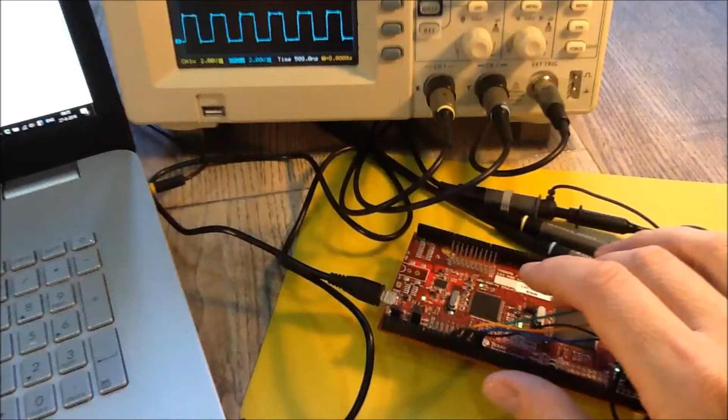I'm trying to make a smart instrument from my Hercules launchpad, an instrument that can be controlled from LabVIEW, and I have made some progress. So what I have done is I've made firmware that listens to LabVIEW commands and then can switch on or off PWM signals. I'll show you here how it works.

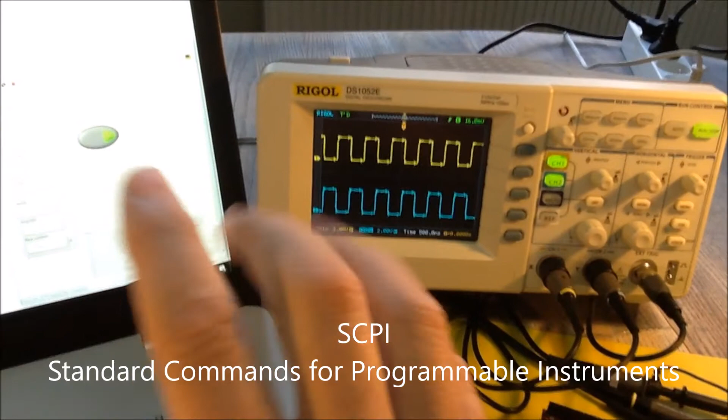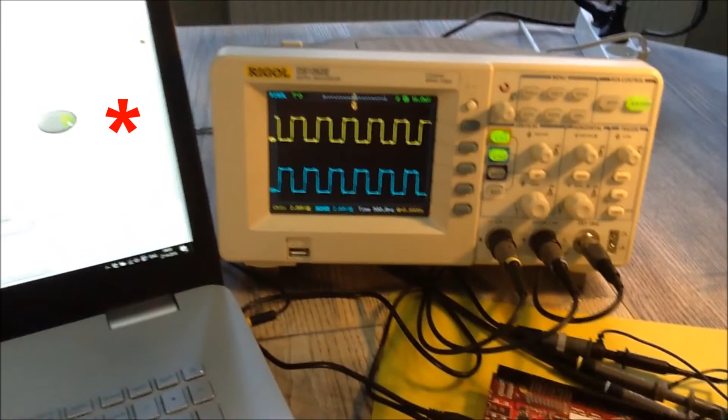This is the LabVIEW project I made. It talks over USB to my Hercules launchpad. The language that it talks is SCPI, the standard instrument automation language, and I'm measuring the PWM signal on my oscilloscope. When I click the button here to off, there is a command sent to the launchpad that switches off the PWM, and when I click it on again, the PWM switches on.

In today's video we will have a look at the LabVIEW project. It's still a simple and straightforward example, but that doesn't matter. It shows that I can talk to the hardware and that I can control the launchpad. From now on, all options are open.

You can see my LabVIEW project here and the corresponding block diagram. The design is based on one of the standard examples of LabVIEW called Simple Serial. The Simple Serial example just shoots a command to a COM port that asks for a device ID, and then when a device answers, the response is shown in these two fields. What I have changed is that instead of asking the ID, I'm giving a command to start or stop PWM.

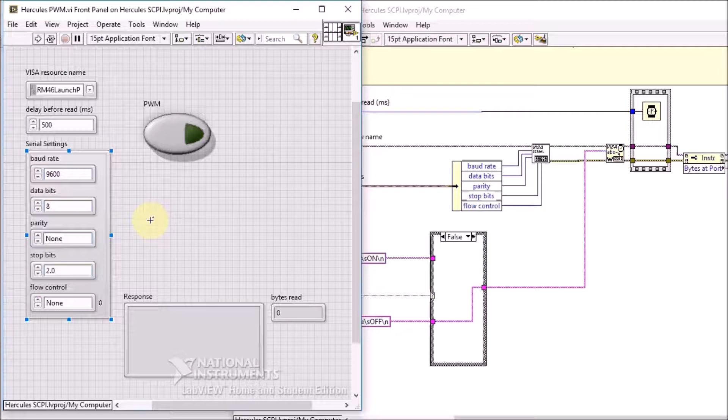On the left side we have the connection settings. This is an alias for your COM port. We have a baud rate of 9600, 8 data bits, no parity, and 2 stop bits. That is identical to how I configured my launchpad. And then I've put a boolean control here that says whether I want to have PWM output or not.

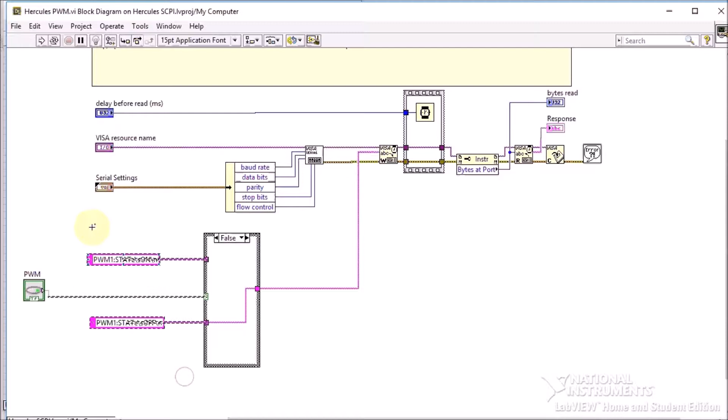If we switch to the block diagram, you can find the same controls back. What you see here are the configuration settings for the serial port. And this is the part that I made to control the PWM. I have two string constants that represent the commands that I'm sending to the launchpad. One is to turn the PWM on and one is to turn the PWM off. And let's have a look at the firmware to see how this works.

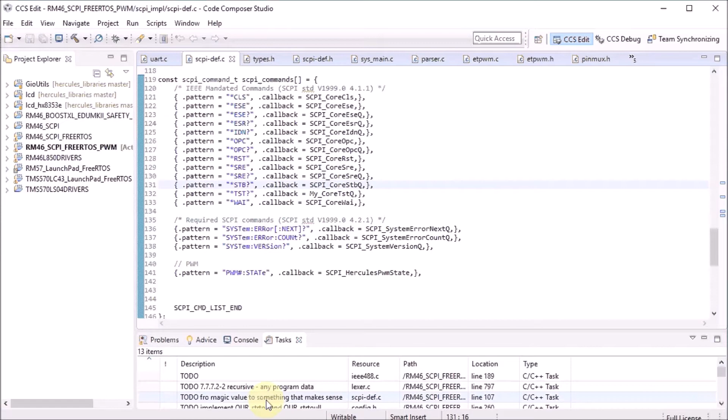I have added a pattern for PWM state commands. So when I shoot a PWM state command from LabVIEW, it will be captured by a function that I provided called SCPI Hercules PWM state, and that one will either turn on or turn off the PWM. And that's what these two string literals do.

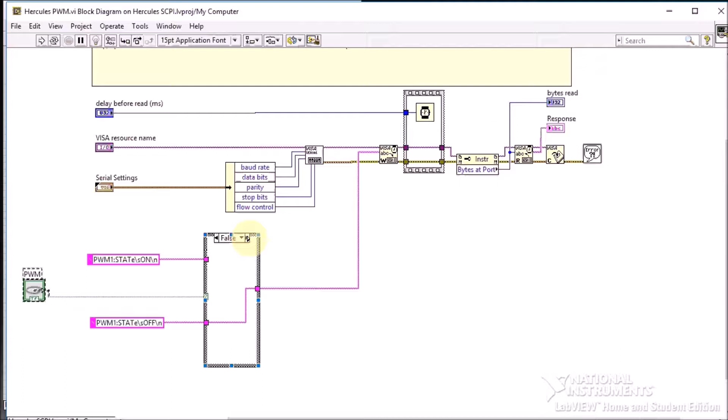The second thing that I've done is added a boolean control, a toggle switch, and that one will determine which of the two commands is sent to the USB port. If I toggle the switch to false, you can see that the lower string literal is passed through, and if I toggle the button true, you'll see that the upper command is sent to the USB bus.

Let's bring in the oscilloscope and see what happens if we run this project with the button toggled high or low. We'll start with low, so we switch off the button. I'll enable the step-by-step option of LabVIEW and start the project, and let's see what's happening. The button is low, so it goes the lower trace. And once the command is submitted, we should see here that our PWM signal stops, and that works perfectly.

Let's now switch our button high and do the same. I'm starting the command and let's have a look at the scope while it's running. Once we reach this point, we should see that the PWM signal switches high. Voila.

And I'll run the two scenarios again so that you can have a look at what's happening while it's running. You'll see that if I put the button low, that this line here switches to the bottom line, and this static control activates when I put the button to high. This line is active and the data flows like this.

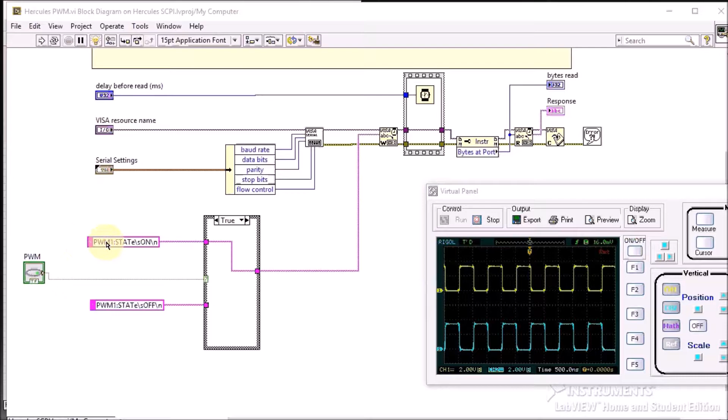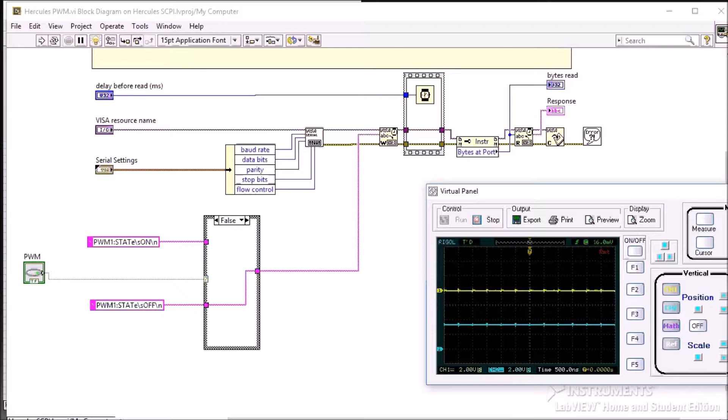So I'm going to rerun it again with the boolean control off. There we go. It switches. The data goes to the control, sends it to the USB bus, and it applies. The button toggled high, the same exercise. Now the control switches to the upper. It's this command that runs to the USB bus, and it switches on.

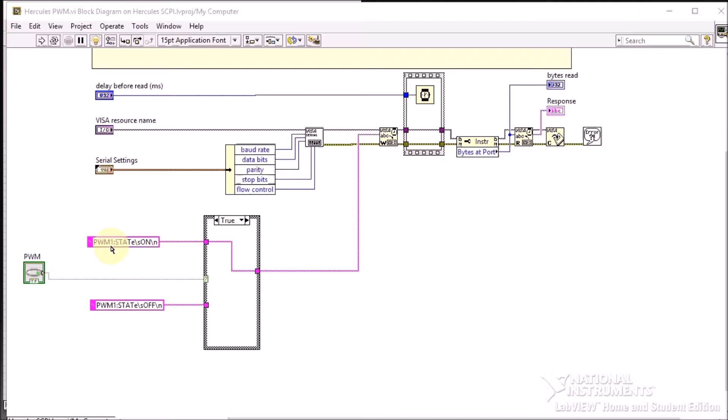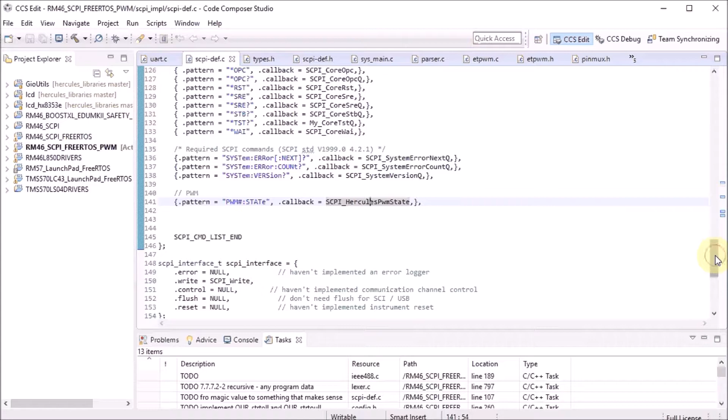One thing you may have noticed is that our command is not PWM state but PWM1 state, but in our firmware in the pattern you see that we have a PWM# state, and this is a placeholder. You can use this command with any number and that number will be passed to this function here. And we can check that out by setting a breakpoint. So let's do that. I'm setting a breakpoint at the start of the function and we'll go to the debug.

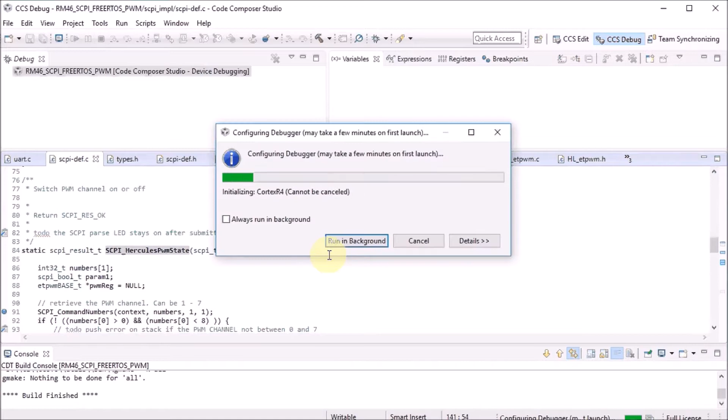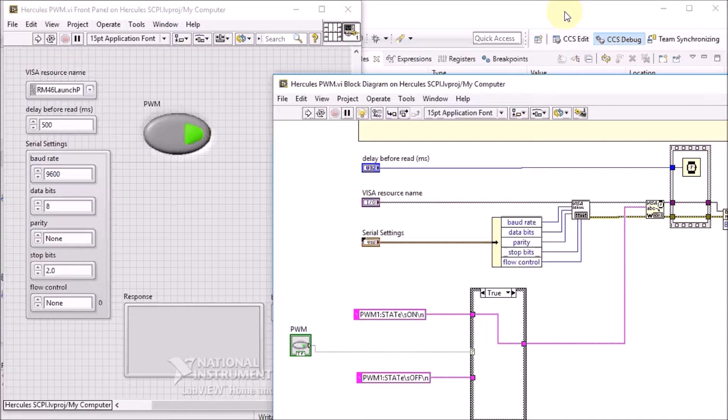I'll execute the program, then we switch to LabVIEW and we'll execute it. When everything is right, we should fall into a breakpoint just when this command is sent. You see that happening here. The command we've sent is the on command, so we have sent PWM1 state on. Let's have a look at how that command arrives in our firmware. The SCPI library looked up our command in the pattern list and called this function. We put a breakpoint there, so we have nicely stopped there.

And the first thing we have to find back is the one here from PWM1, and the library has a function SCPI command numbers. If we execute that, we get an array of all the command numbers that we have submitted, and in my case I've submitted only one, and that's with the value 1. So this one here represents the one after PWM1. With that value I take care that I find back the correct PWM register in my Hercules microcontroller.

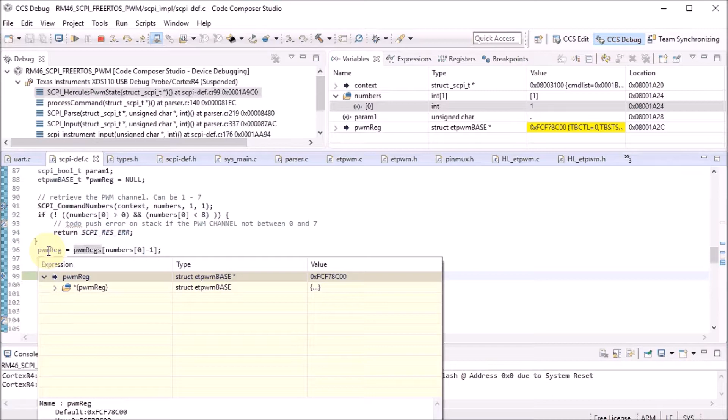And that's done here. So now this variable points to the correct hardware register that controls PWM module 1 of my launchpad. And then based on the parameter that we've sent, we will either switch on or switch off PWM. The parameter that I've sent is on. In SCPI we can get that parameter back by asking for the first Boolean parameter. And that parameter should be true because we have sent an on. There we go, we get a value 1.

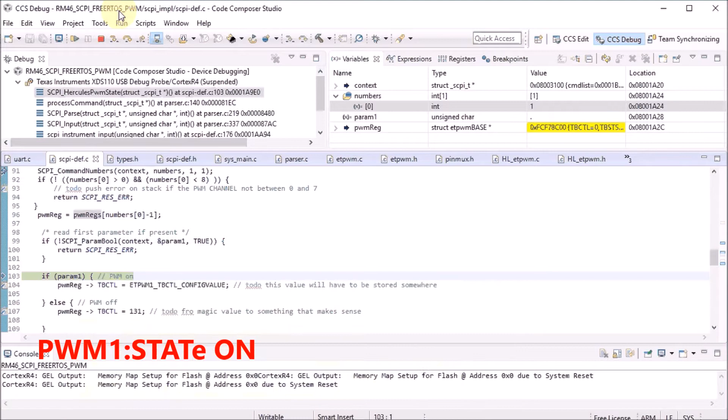And on in our case means that we want to turn PWM on. So we write the right value to the hardware register for PWM module 1 of our Hercules microcontroller to turn that PWM signal on. If I step through that, you see that happening here.

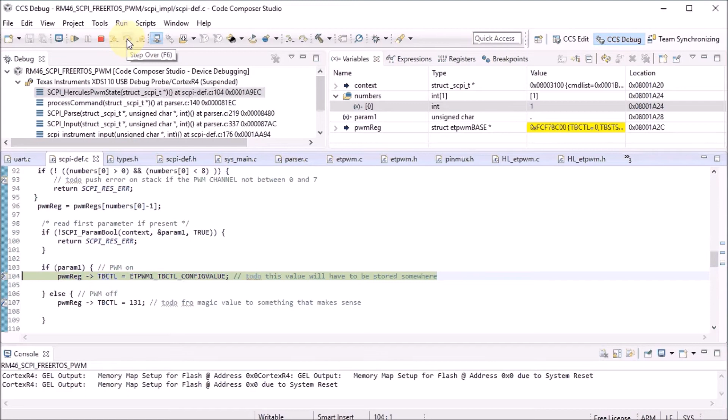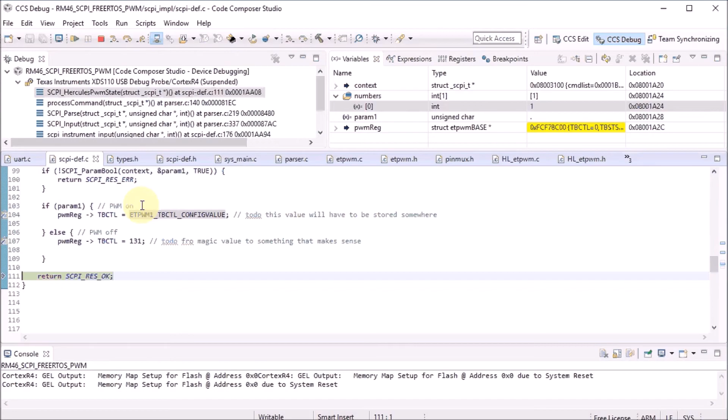And that's it. At this point our firmware has turned on PWM module 1 of the Hercules microcontroller as a reaction to a SCPI command sent from LabVIEW. And this is our endgame, an instrument that knows how to react to commands from LabVIEW and that uses industry standards to do that.